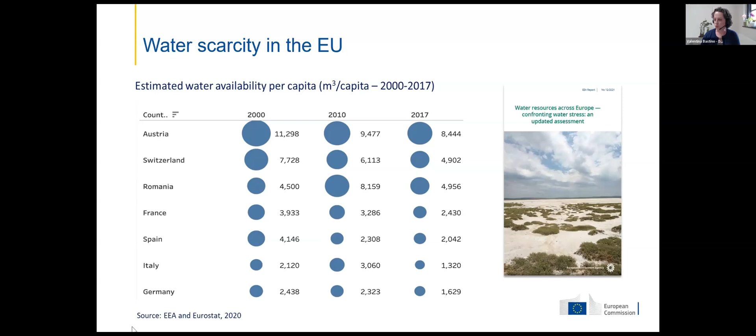This was data from 2019, which was a particularly dry year, but in certain areas of Europe, this remains indeed the case. So yes, we have a problem.

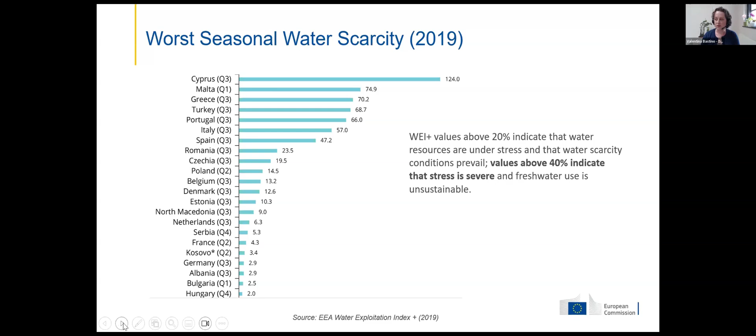As recognized by the European Climate Risk Assessment published earlier this year, Europe is facing increased likelihood of extreme weather events, which could be mega droughts lasting for multiple years, to extreme precipitations. And we have seen it. It's quite common in the news, unfortunately, these days to read about catastrophic flooding or very long and prolonged periods of droughts.

I find this picture on this slide quite telling. It's a picture of a reservoir in Castilla y León in Spain. It dates back to February 2020, and the calculation was that it was only filled at 35 or so percent of its capacity. That was in February, during the winter months, where more water is normally available. So this is quite telling of the situation unfolding before our eyes in several places in Europe, compounded by excessive amounts of water falling at the same time and causing flooding.

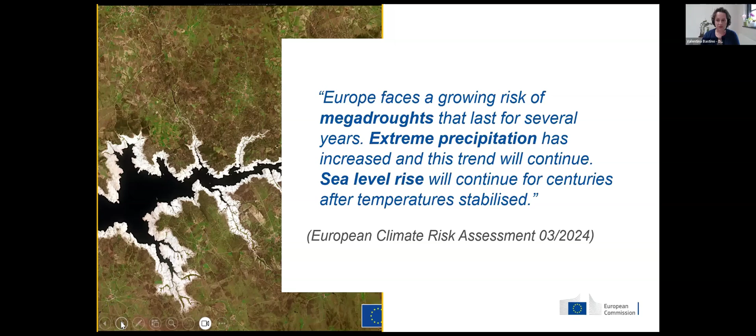This increasing evidence that is mounting, and that can be seen also by non-specialized audiences, I think people start seeing that there's indeed a problem. This led to a slight policy shift whereby next to mitigation measures, we started really looking at adaptation measures to face climate change. This was already a bit the case when the EU climate change adaptation strategy was published a couple of years ago, in 2021.

The strategy called already for several measures to increase resilience and climate resilience in water management. Such actions to better adapt to climate change were about improving coordination between sectors, but also across borders, underlined in this European dimension, to devise measures to better prepare and manage droughts and floods, and on the other hand, to really push for nature-based solutions instead of just exclusively focusing on grey solutions, improving sustainable management of soils to increase water retention capacity.

But I really want to focus on the last point, which was a call to reduce water use by encouraging water efficiency and water savings. And if I may say, water reuse is a clear efficiency measure whereby we're using the available water resources more than once, so to speak, to make more efficient use of this precious resource.

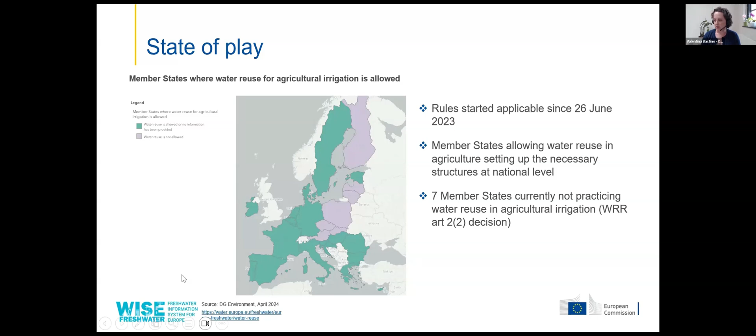Both directives contain provisions supposed to encourage water reuse in settings other than agriculture. The Urban Wastewater Treatment Directive calls for systematic promotion of water reuse in any field. It recalls that if water reuse is done for agricultural irrigation, it should follow the rules of the water reuse regulation. Finally, there's been the introduction of a derogation from tertiary treatments in case of reuse in agriculture. In the draft directive, tertiary treatment is defined as processes intended to remove nutrients. This derogation is intended to facilitate the uptake of water reuse and preserve nutrients in the water when used in agriculture, with safeguards to avoid exacerbating eutrophication problems in areas where that issue may already be present.

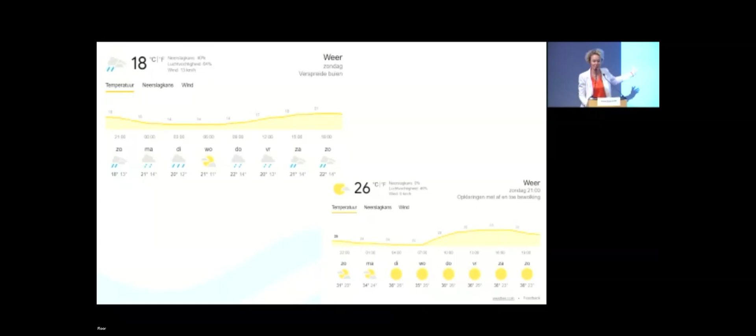When I started making this presentation, first of all, thank you very much for the invitation, it was a pleasure to make it. So when I started last week, that was the weather forecast - that's Belgium, that's here. I was very happy to come here in real life, so I could also enjoy a little bit of sun. It was difficult for me to make a presentation about water scarcity with this kind of weather, especially this year, but last year it was also not so good.

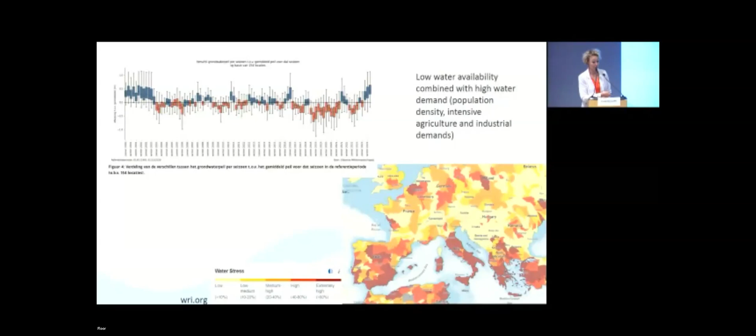So the reason why - I took the map of Europe, you can see Belgium, a very small country, but especially the north part, Flanders, is really dark red like Italy and Spain. The reason is because we are very small but have a lot of activities. Population density is very high, we have a lot of agriculture, and we're making a lot of beer in Belgium, probably you know. But that puts a lot of stress on the water infrastructure. So we have to find solutions for the future, even with quite a lot of rain during the winter, to have enough water during the summer periods. That's a little bit our water landscape in Flanders.

We are very dependent on the region of Antwerp. There we have the Albert Canal, which comes from the Maas. The Albert Canal is responsible for 50% of the drinking water production in Flanders, which is huge. So when there is a problem there, 50% of Flanders doesn't have water anymore. So you understand there is a very high risk.

There is a very strong infrastructure in Flanders - the water produced in Antwerp, but also from the colleagues from Vivaqua, we are transporting from Brussels to Ghent to Ostend. There is like 140, even more kilometers of pipelines, very big ones. So if there is a problem with these pipelines, we have a problem getting water to the sea coast region. It's very sensitive - it's working very well, it's very robust, but if something happens, we will have a problem. So it's important to have enough different sources, but also sources strong enough for the future when we have a lot of climate change.

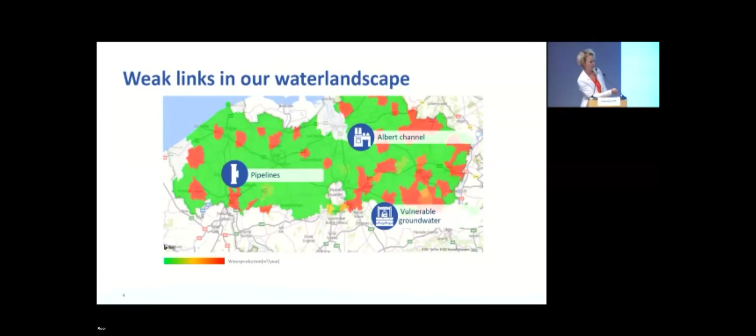Another example, in California, they did 10 years of research on the regulation of water reuse. So I think here in Europe we have to learn from them, exchange some knowledge, and take the most important things they have seen during the previous 10 years to also use in Europe.

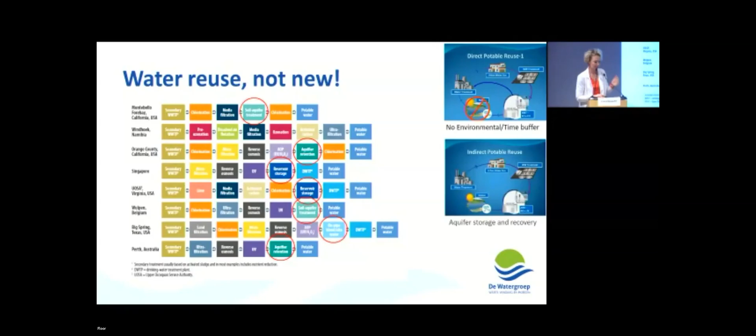There is a very important difference between direct and indirect reuse. As you can see on the screen, on the top right, direct reuse means you don't have a buffer - directly, when you have the wastewater, you treat it and then it goes again to the households, to our customers. With an indirect reuse system, you have a buffer, time to tackle a problem in a reservoir or something. With the red circles I put all the examples, and you see most of them are using indirect reuse because it's a stronger treatment system - it's less sensitive to unexpected change. So that's very important to take into account when you want to do water reuse.

Our minister of the Flemish region launched a Blue Deal. It was the first time in Flanders that the minister gave so much money on water, which is good for us, but also meaning it's important to invest in a lot of research and innovation on water.

The whole Blue Deal is a huge amount of projects - 343 million euros that the Flemish government is investing in demonstration projects. Today I will present 3 of them, plus another project which is a Horizon project from Europe. I'll give you an idea of what we're planning or doing now. Two of these projects we are doing together with Farys, our new company, the Watergroep and Farys Waterunie.

So the first project is Batteau. It's the name - ship in French. The idea is to have a kind of winter-summer battery. I will explain a bit more in detail.

That's the infrastructure we have. I mentioned these very huge pipelines between Brussels and Ostend. The water is coming from the region of Antwerp, but also from the colleagues of Vivaqua, flowing into our distribution system.

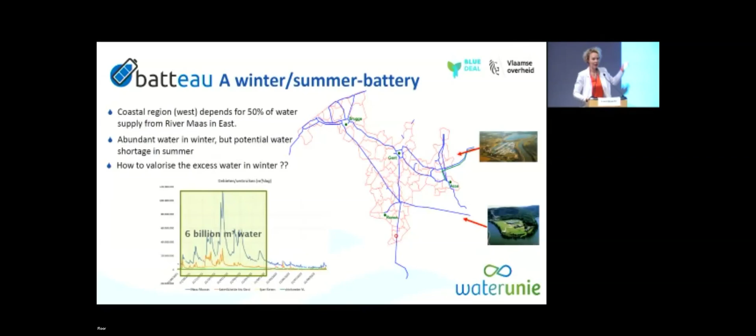We have a huge amount of water in the winter - you can see it in this graph, like 6 billion cubic meters of water available in the winter. The red and green lines at the bottom show the drinking water consumption. So we have enough water, but the problem is storage.

So the idea is to have this kind of battery. We put the water underground - we call this aquifer storage and recovery. We do this only in the winter because that's when we have a lot of water, and then in the summer we pump it out.

We do this at 2 different places, in Aalst and in Oudenaarde. Why these places? Because they're very close to the main line, so the distribution system is available there.

With this project, we have a potential of 350,000 cubic meters of drinking water, which is more or less the same for 10,000 equivalents. You can see some pictures beneath.

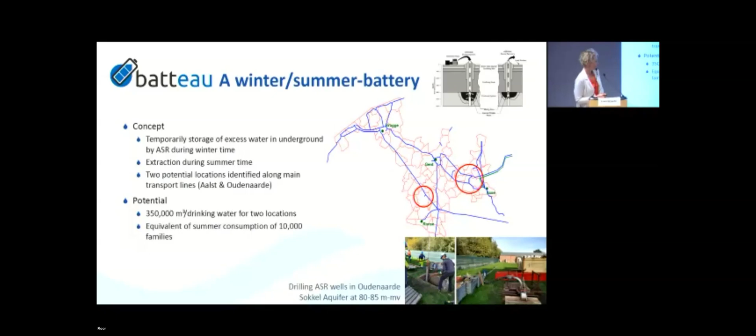Another project, called Deeper Blue, is similar but not only storage using the already existing drinking water infrastructure - we will do it with a new source: wastewater, the effluent from wastewater.

The wastewater treatment plant of Aalst, operated by Aquafin, has the possibility to provide more or less 32,000 cubic meters a day. A very small part of this water will be treated using ultrafiltration, reverse osmosis, and activated carbon.

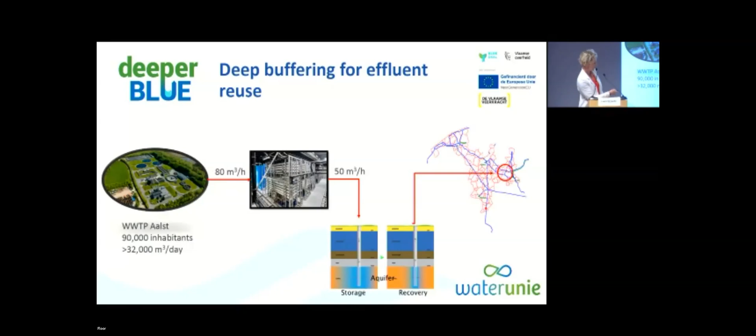We will put this in the underground, and then extract it at the same place as the other project. The ambition is to have a storage of 100,000 cubic meters of drinking water, storing it in winter and using it again in summer.

Why? Because in Flanders we have environmental flows - we're not allowed to use all the effluent from the wastewater treatment plant because local rivers and agriculture also need this water. Even though the volume is very small, the agency is very strict - we have to use this water also for the environment. So you can feel the competition between drinking water industry and agriculture for the same source of water, which is very important to consider when doing water reuse projects.

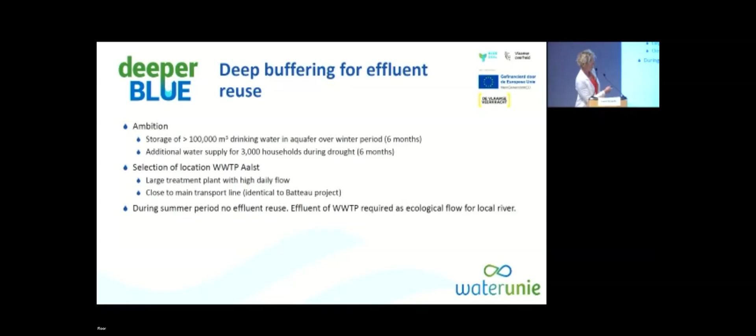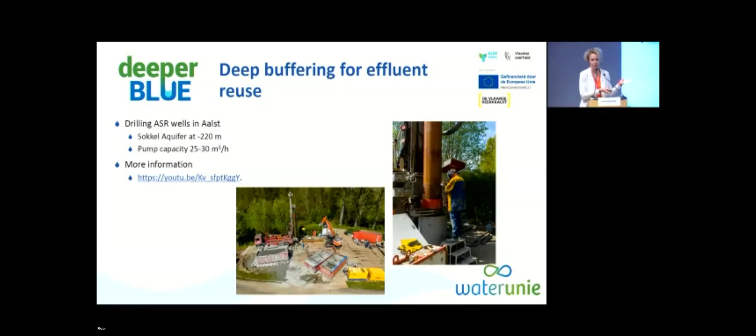There's some more pictures of it, and you can see when we started drilling in the ground. I will also share the slides - there's a YouTube video with more information on the project if you are interested.

We are moving from the west of Flanders to the east of Flanders. There, remember the other picture, there is a lot of groundwater extraction plants. And to be honest, we have much more difficulties getting our permits there.

It's strange because in the past it was like, okay, it's for drinking water, so we are allowed to extract groundwater because water is a primary need. But now we really have problems with nature, with other stakeholders, so it's very difficult to get our permits for groundwater. That's why we have two projects now.

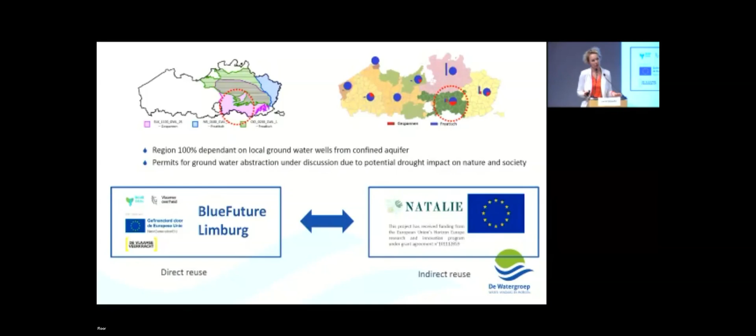One is Blue Future Limburg and the other one is NATALIE - one of the Horizon projects I mentioned, where we will compare direct and indirect water reuse at the same location.

On the left side of the slide, you can see the information of the Blue Future Limburg project. We will first do a proof of concept, it's now in a tendering phase, so we will also tender everything together.

The R&D part and also the full scale part will be together with a private partner for a period of 20 years. It's also the first time at the Watergroep that we will have such a close collaboration with a private player. I think it's important to mention because most of you are from public utilities, so that's also part of the research, to see how this collaboration is going. Because most of the time when you are building a new plant, you are used to work with partners like Veolia and so on.

But when it's for operation, I don't know in your country, but in Belgium we are not used to that. So it's the first time that we will not only contract the building, but also the operation for a period of 20 years. The thing we also like to investigate in this research is the financials, because when you are building it, you are usually planning for 20, 30, or even 40 years. Here it's completely different because the private partner will do the investment for you, so that's also interesting to see how it's going.

But there is still an important research part because, how we will tackle this, it's direct reuse, so there is no buffer - it's directly from wastewater to drinking water. So which kind of treatments the private partner will do, how he will be dealing with the microbiological and chemical contamination and so on - that's all things we will do now in this project.

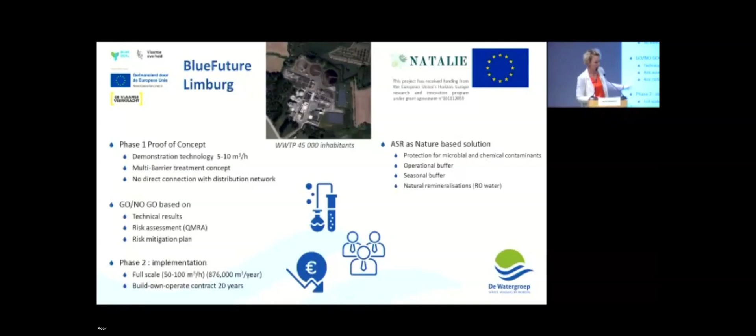I put more information about this Horizon project because it's not only in Belgium, but there are a lot of projects also here in Greece, but also in other countries in Europe. So I will share the slides, and then you can also have a look if you are interested in the other demonstrations.

That's it, I hope I'm still on time. If you have questions, I will be very happy to answer them. Thank you very much, Louise.

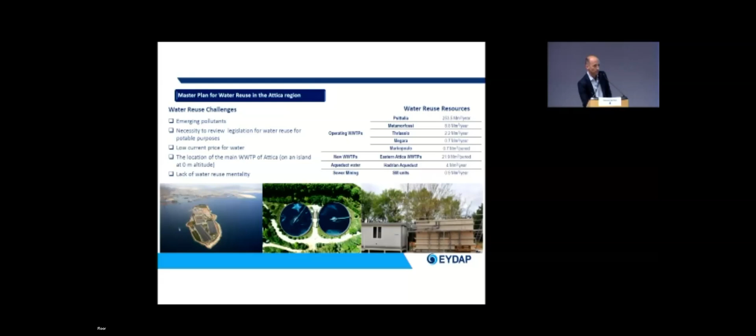Sorry, I'm skipping. Before I go to the decentralized, let me just show you the plan that we already have to utilize our wastewater for agricultural use. This plan is focused on the eastern part of Attica, where most of our agriculture is. So this is a big plan, and right now we're very busy doing that.

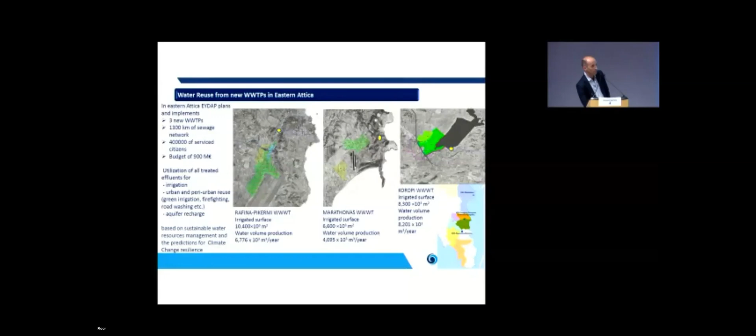But let's move now to some decentralized approaches. So what is sewer mining? Sewer mining is an innovative technology we have developed, which is green, 90% autonomous, and I think we're going to make it 100% autonomous. It will be remotely operated, which means that we lower OPEX as much as possible. And the plan is to use it as much as possible in Attica in order to make the system as sustainable as possible.

Right now, we are talking about a CAPEX of 280,000 euros per unit, and it goes up to 600,000 euros per unit, and an OPEX that can reach even up to 1.47 euros per cubic meter. Now, that's not a good price. And actually, this is another challenge of Athens. Athens, apart from all these things, also has very cheap water, the tariff is very low. So making it a sustainable water reuse system is very hard because energy is needed.

You really need to, your own competition is very large. The Hadrian Aqueduct, what is the Hadrian Aqueduct? It's something that you will see in a little bit. The Hadrian Aqueduct is a Roman aqueduct spanning the city of 24.5 kilometers, and we are providing some water from it. In the next few years, we're going to do many works about that.

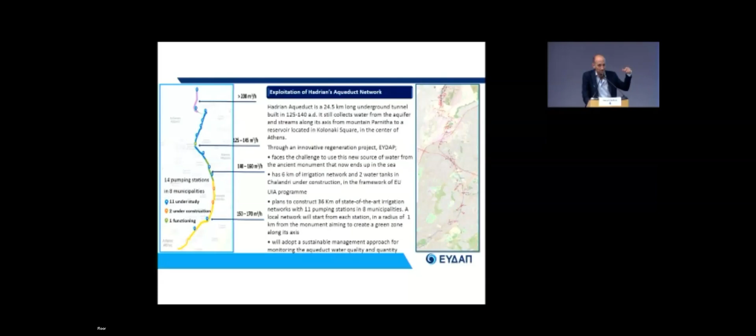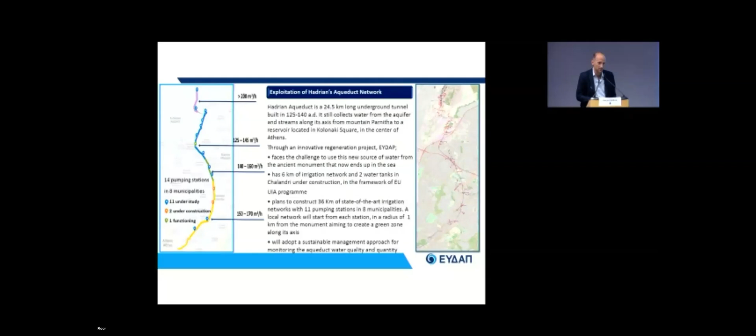What kind of synergies with your policymakers, with your technology experts, with your industry, with your agriculture? What kind of incentives? What kind of challenges do you face together? How can we make a plan that will happen, is sustainable, and will reach the commitment of all the agents and stakeholders involved in order to make it happen. It is not an exercise that is simply proven. You really need to work together for this vision to happen. This is how I wanted to end this presentation, and thank you very much for being here again.

Thank you very much, Giorgio. So we heard you: coordination, incentives, and community engagement. We are moving from Athens to another region where there is huge water scarcity and drought issues, which is Catalonia in Spain. So I would like now to introduce our next speaker, Jordi Molist, who is Director of Water Supply at the Catalan Water Agency in Barcelona, Spain. Jordi, I hope that you can hear me and that you are joining us online. I can see you perfectly well, so that's great. Yes, I can hear you. Good afternoon. Excellent. Jordi, so Catalonia recorded last year record high temperatures, and this even led to water restrictions in Barcelona earlier this year. So I would be very keen on hearing from you what's the strategy in Catalonia to promote water reuse. Over to you.

Thank you very much, and thanks to your organization for the opportunity to speak here today. I will share a presentation. I hope it will work well. It's working well. Okay, thank you very much.

Well, yes, I will explain our experience with this extreme drought event that is still ongoing in Catalonia and in Barcelona, and especially in the aspects related to indirect potable reuse.

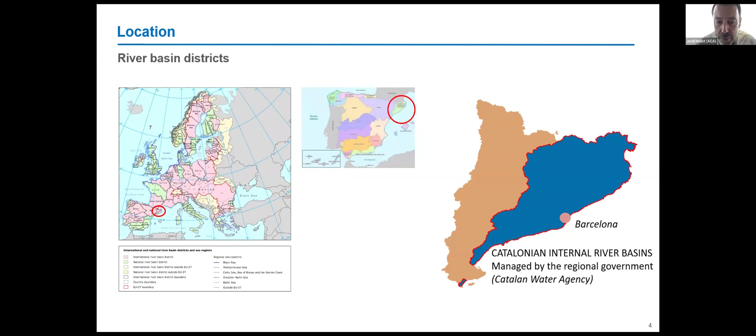So, well, just a few words about location, and then I will go to this topic. As you may know, we are at the other tip of the Mediterranean Sea, and Barcelona is in a region which is Catalonia. This region is divided from a hydrological point of view into two sides. Only the eastern side, which is in blue in this picture, is managed by the regional government, while the other side is managed by the national government because it's part of a larger basin. One issue of this division is that people are on one side and most of the water is on the other side. So we are managing the more difficult side because we have a lot of population and scarce water resources.

And one consequence of that is that our main use is urban consumption. This is something different from other regions in Spain where agriculture is more predominant, but in our basin it's urban consumption. And this is one of the things that help to explain our bet for potable reuse.

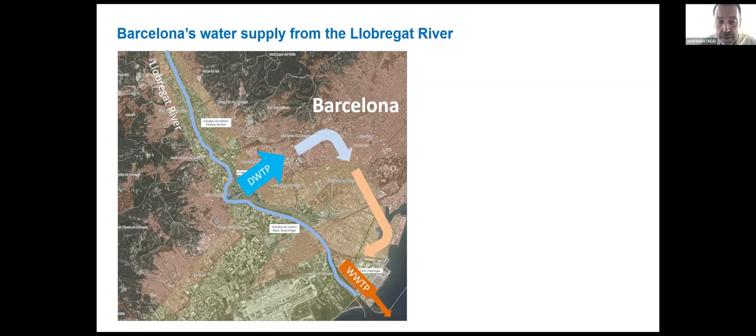So, well, I will show you the Barcelona water reuse scheme with some milestones, to understand how we reached the place we are now. We can see here the Llobregat River, a small river, but anyway it's one of the main sources of water supply for Barcelona. This is how it worked 20 years ago before the reclamation scheme was built: there was a drinking water treatment plant from the Llobregat River, and then the wastewater was collected, treated, and discharged into the Mediterranean Sea.

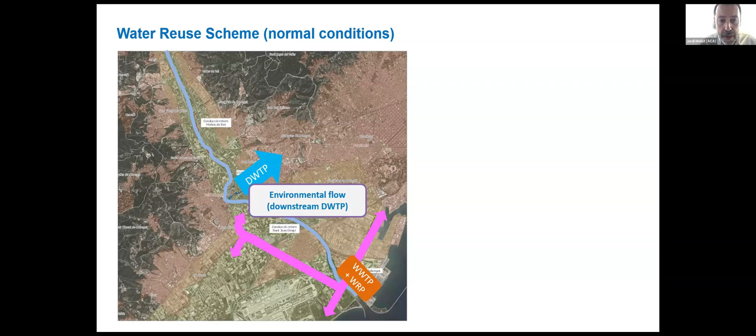Later, in 2006, we built the first stage of our reclamation system with a water reclamation plant, and then 3 uses were put into operation. The first was to pump the reclaimed effluent downstream of the drinking water treatment plant as an environmental flow. This was useful because in this way we didn't need to release water for this purpose from the dams, so it was a saving of water in the reservoirs. The second use was crop irrigation. And the third, which was our first step on indirect potable reuse, was a system for groundwater replenishment, and the main purpose of this system was to fight seawater intrusion.

Due to many decades of overexploitation, the project was to build a hydraulic barrier with 14 injection wells where reclaimed water was injected to create a freshwater barrier, trying to expel the seawater outside of the aquifer.

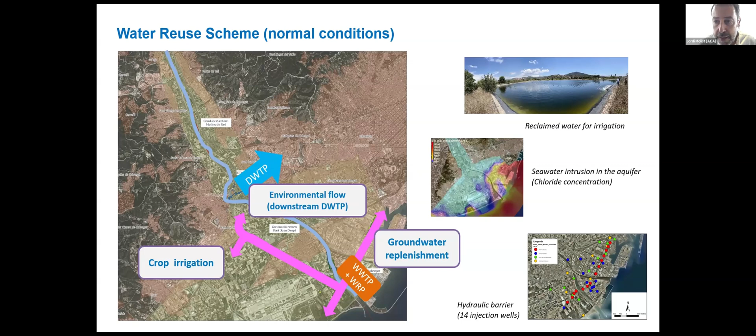This was the system as it was in 2006. In 2008, we had a large, important drought. After the drought, we decided to enlarge the system with this addition.

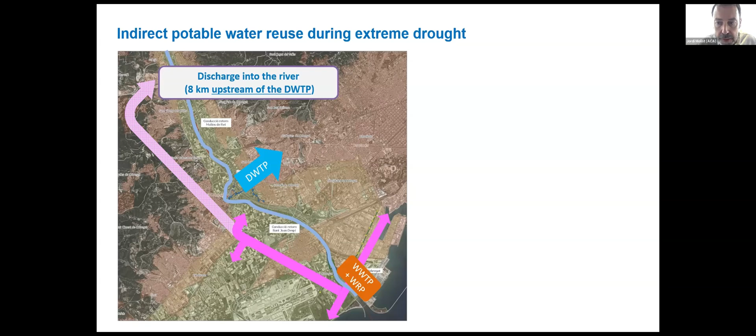This was built at that time as a safety net, something we didn't expect to use often, but we made some trials, which I will explain in the next slides, just to keep the system prepared to enter into functioning.

Then came the present drought, which is much more extreme than the drought of 2008. It is the worst drought in 100 years of registers. So we put the system in operation, and now this system has been in continuous use for 1.5 years.

Then this mix goes downstream to the drinking water treatment plant, and the water for the supply of Barcelona is produced. The main issue here was to guarantee that this scheme was safe from a human health perspective and also from an environmental health perspective, because it was affecting 8 kilometers of the Llobregat River.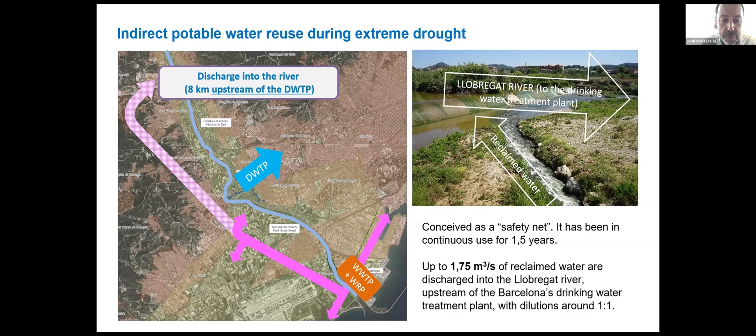This was what was tested in the trials previous to the drought. The first thing we did some years ago, before the drought, was to establish 2 working teams: one with all the stakeholders part of this project, especially the Catalan health authorities, us as the river basin authority, the local council, and the operator of the plant. It was useful to integrate all the stakeholders from the very beginning of the project.

There was a second group formed by independent experts, people from research centers and universities. They were not linked to the government and acted as a secondary testing of the idea, monitoring the process. Both groups established a trial that was designed in 2018 and carried out in 2019.

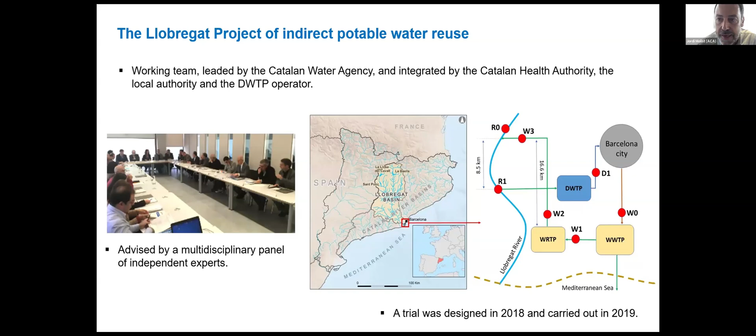I will not go into details here, but in fact the most important thing for the success of this project was this trial in 2019. During 2 months we were using the system. This was before the drought, and we were putting the reclaimed water into the Llobregat River and producing drinking water.

We analyzed a lot of compounds there, almost 400 compounds, to give the health authorities the security that the system was safe for human health concerns. The most interesting part was that at any stage of the treatment, mainly in the wastewater treatment, we found 100 compounds.

We had to establish guide values for these compounds, both from an environmental perspective and from a human health perspective. It was not easy because most of them were not regulated anyway, neither in Europe nor in other countries. So we had to establish, with the help of the expert group, guide values for all of this.

At last, the final result of this trial was that only one compound in the drinking water was near to these established guide values, only one. Then some measures were taken to reduce this. In fact, the measure was to modify the discharge permits of 3 factories that were using this compound.

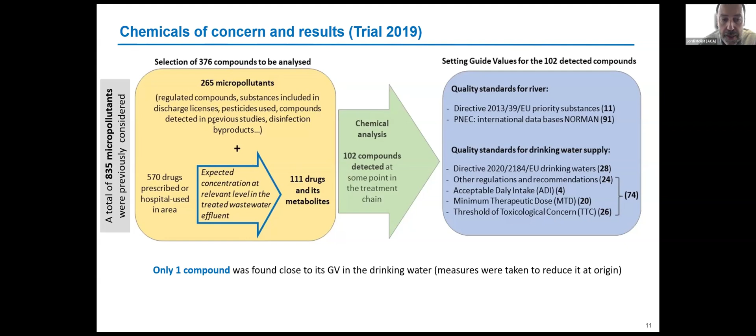Some things have changed from that moment, and most importantly, the non-target analysis methodologies are now much more precise. We are completing all this methodology with non-target analysis, which are now semi-quantitative, so we are aware of any new compound that could show up with these methodologies.

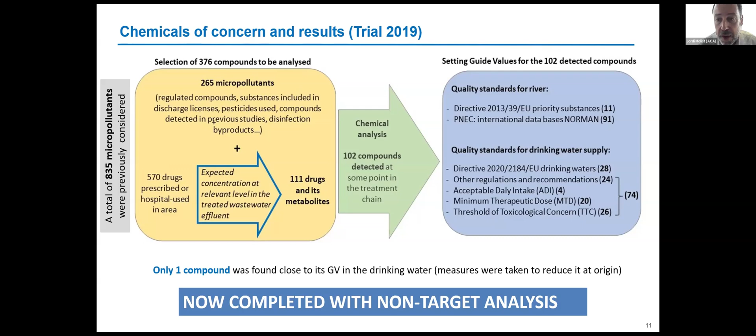So, what is the effect of this on the drought? As you can see here, this is the composition of the components of the bulk water supply in the Greater Barcelona area, which is an area with 5 million inhabitants. You can see that indirect potable reuse has been an important part of this water supply system during the drought, and also desalination.

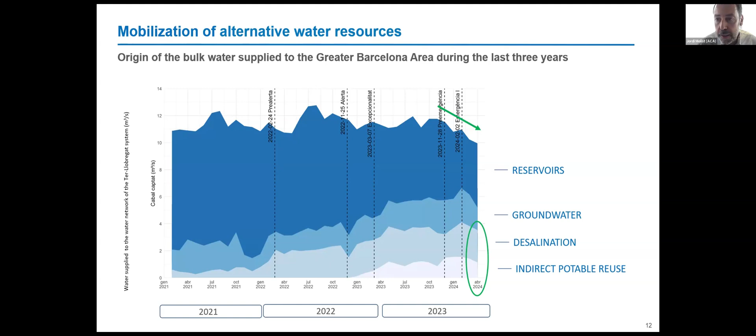If we take both together, we can see that around almost 40% of the Greater Barcelona supply has been done with non-conventional resources, and this has been very useful to face the drought, avoiding a complete depletion of the reserves.

This is the evolution of the total water volume in the reservoirs, and as you can see, these measures have helped to reduce the declining rate. This last spring has been more rainy, and we are a bit better now. We are not in the emergency state, but thanks to desalination and indirect potable reuse, we have been able to cope with this drought.

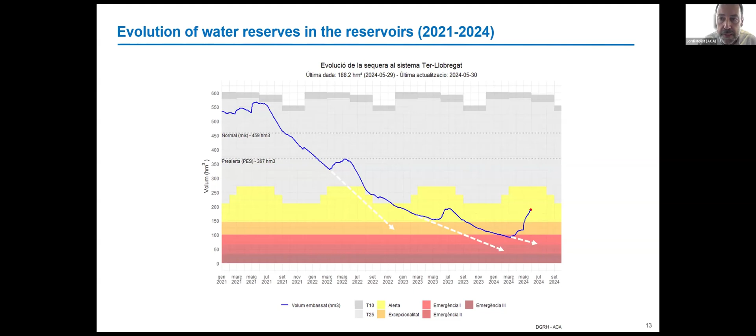And just one more slide about the future.

Well, we are working on these same lines, desalination and indirect potable reuse, to increase the security of Barcelona's water supply. As you have seen in the current drought, we have been able to cover almost 40%, 36% exactly, of the total demand of these 5 million inhabitants with indirect potable reuse and desalination.

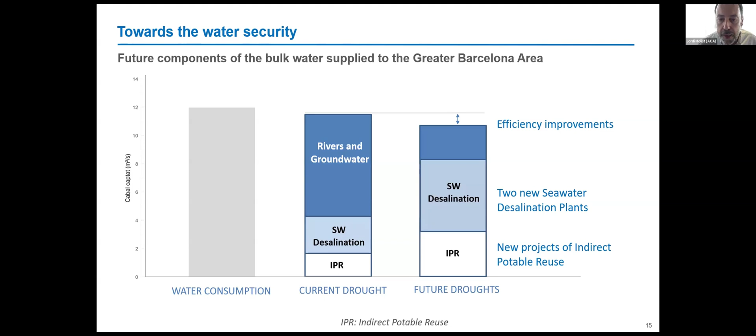This is our plan for the next 5 years, and the main project of these new indirect potable reuse flows is the Besòs River. This is the other river in Barcelona, which we call a river, but in fact is made 90% of treated wastewater. Now, using the methodology of the Llobregat River, we are confident that we can produce drinking water from this river of treated wastewater.

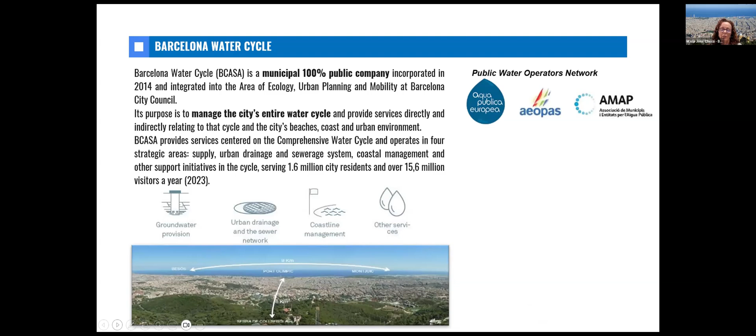Barcelona Water Cycle is a public company, and we are working with the network of public operators at the European level, at national level, and in Catalonia. We also work with international associations and cooperation, participate in European projects and other initiatives, in order to do the best with our resources.

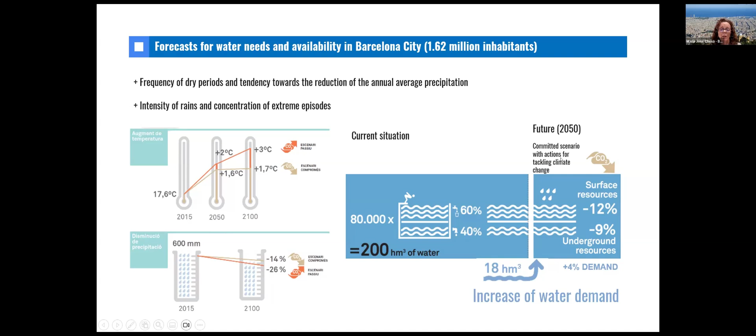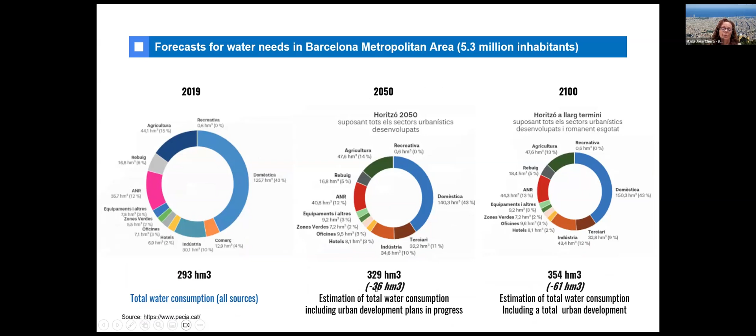The forecast for the future is like the other presentation: the increase in demand and the decrease of resources produce a deficit, in our case for the city of Barcelona, of about 18 cubic hectometers by 2050. At the metropolitan level, the forecast for the same date is also a deficit, of 36 cubic hectometers.

We need to explain that the evolution of water consumption in the domestic sector in Barcelona is the same for all of Catalonia. We are now at less than 100 liters per equivalent inhabitant per day. If we compare water consumption at the beginning of this century to now, across all sectors, we see good behavior, a good decrease in this consumption for the same population.

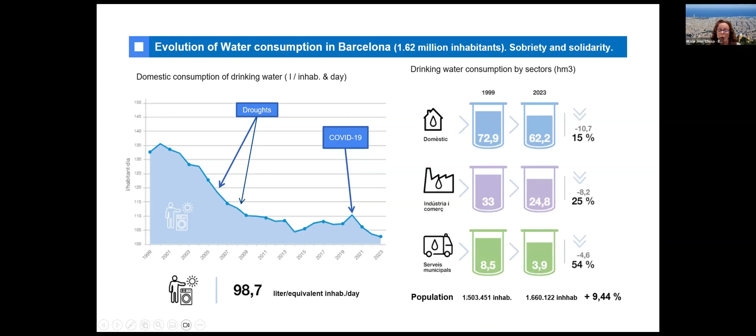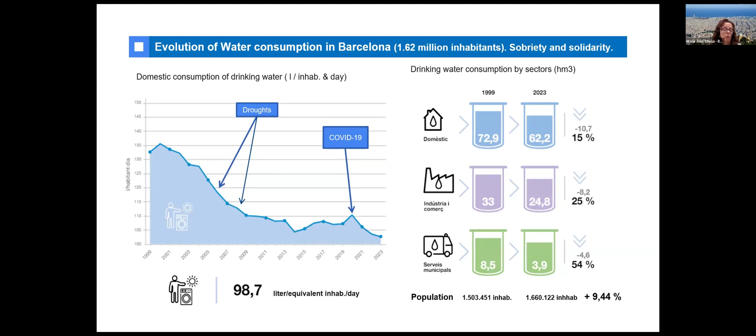We are doing a lot of effort to avoid the consumption of potable water and use other alternative resources. We have had, since 1998, an alternative water resources master plan for the city of Barcelona with 7 action lines, in order to use kilometer zero water and alternative water resources, like groundwater, regenerated water from the wastewater treatment plant, grey water, which we'll explain and focus on in the same slide, and also the use of rainfall and direct seawater.

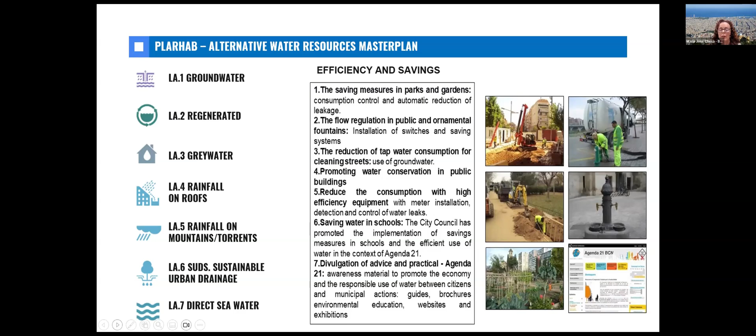We have also measures for improving the efficiency and avoiding water losses. In all the things that we can act, we are doing this. But now, about the drought that we are facing, we need at the level of the cities to work with new regulation to increase the use of alternative waters and preserve drinking water.

We are now working on this new regulation about the use of greywater in the city of Barcelona. We started at the beginning of this year, and we need to have a new regulation in the city. We need a lot of reports and evaluation on the impact of this new regulation. We have several master plans in the city, and also an emergency action plan that is a commitment to start this regulation. Now we are working on this ordinance about the use of greywater.

What is the objective? It's clear: reduce the consumption of drinking water in the city. What is grey water? In this ordinance, it refers to water from baths and showers, and also water from the maintenance of swimming pools. This water, once treated, can be used for flushing toilets, and also for watering and cleaning green areas and spaces.

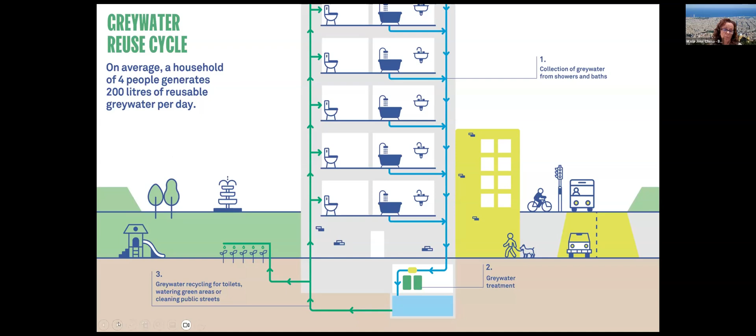This is a scheme about the installation that we are considering in this new regulation. With this solution, we have a high potential for saving, because the production of greywater compared with the use - these are the numbers for a typical household in Barcelona - we have a good balance between production and use.

About the legal framework, at the national or regional level, we don't have any mandatory regulation to build this installation. In the past, we had some regulation that forbade it - it was impossible in the residential sector to mix different qualities of water. In the past, we needed only drinking water, but the regulations are evolving. Now we have ordinances in different cities in Catalonia and Spain that regulate this use.

Near Barcelona, in Sant Cugat, we have a previous ordinance. In the Barcelona Provincial Council, we have also a proposal below. There is a national standard for the installation of this system. And in Barcelona, from 2022, it is mandatory in new planning areas to install greywater recycling systems.

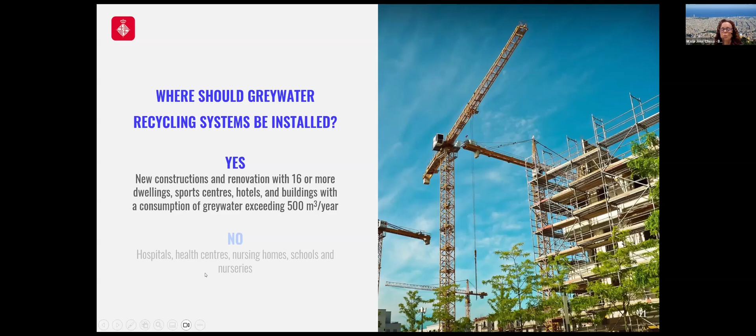Now we are working on this for the whole city, and this installation will be required only in new construction or major renovations - in residential buildings with 16 or more households, and also other activities with a consumption of 500 cubic meters of grey water for flushing or other uses per year. We don't recommend it for hospitals or schools or other centers where there is a risk in this use.

What type of water? Only water from showers, baths, and the maintenance of swimming pools. There are other resources that we don't consider, due to risk, when we look at the balance between production and use - we don't need more water than what comes from showers and baths.

This ordinance, this regulation we are working on now, will also define the responsibilities for each actor in the project, construction, and maintenance. From the experience of other cities near Barcelona, this is key to the success of this installation.

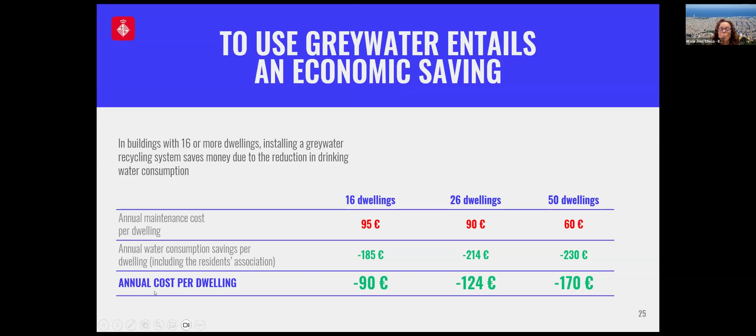We also have a regulation in Barcelona that requires a new ordinance to have an economic impact assessment at the environmental, social, and economic level. We need to run different simulations for residential buildings, hotels, and sports centers, showing that this solution will be a benefit at all these levels.

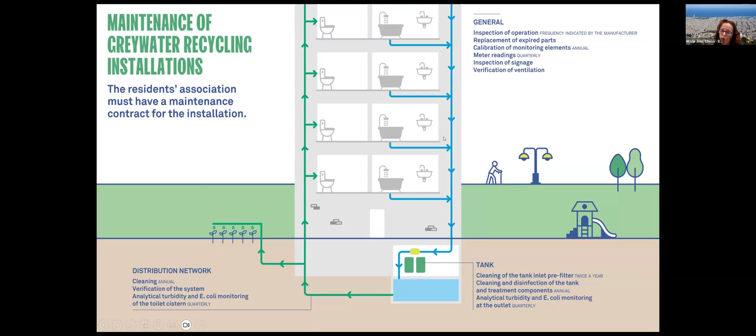This is the scheme, and I want to highlight the importance of maintaining this system, because we need quality for these uses. We need zero E. coli, and we need an effort to control the quality throughout the whole process.

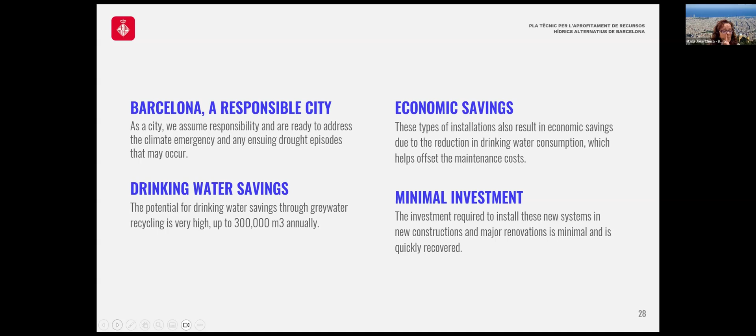To conclude my presentation, I would like to say that Barcelona is a responsible city that is addressing a new regulation to preserve drinking water resources, and we have economic savings with minimal investment. Thank you very much for your attention, and we are available to answer any questions now or by email. Thank you very much.

Thank you so much, Maria Jose. It's very much appreciated. We see here that what we ask people, and maybe it's the most difficult part, is to change, because here it's a real paradigm shift. We ask people to really consider the value of water. And we move from a situation where water was freely accessible to a water scarcity. I think this is really tough here.

So it was really interesting to see what Barcelona is considering, because I think it's not yet approved, but there is a process of considering this new ordinance.